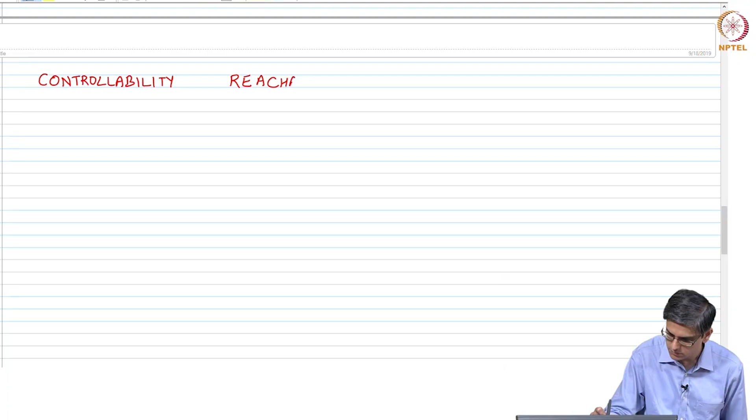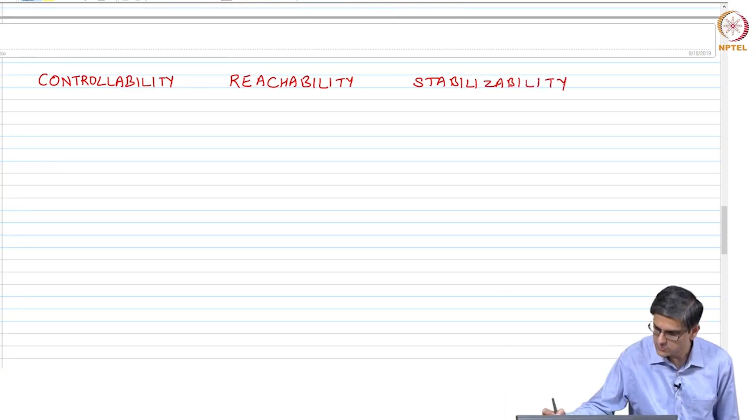Let us now talk about the next concept, and that is controllability or reachability or stabilizability. Okay. Let us look at the example that we had seen right in the first lecture of module 2, we talked about a stirred tank heater.

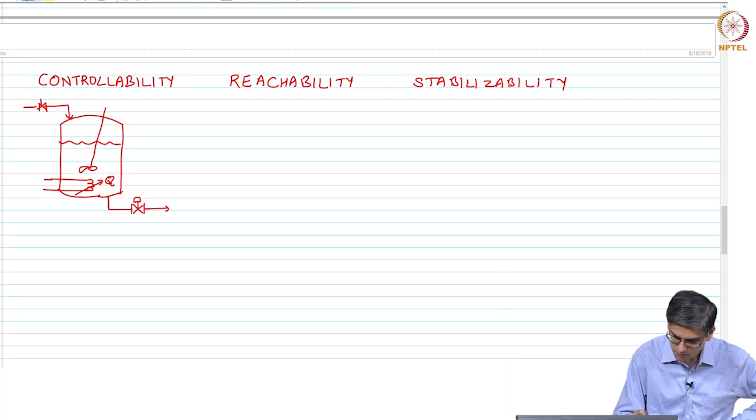Okay. We said that we had two inputs, Fin and Q, and we had two states and two outputs, height and temperature. Okay. By changing flow rate, you can change both height and temperature, right, but by changing Q, you can only change the temperature, but you cannot change the height.

Okay. So, this idea we will now go ahead and formalize into this concept of controllability, reachability and stabilizability, three related concepts, but still they are three different concepts. Okay, very closely related but slightly different concepts. Most of the time you would hear the term controllability.

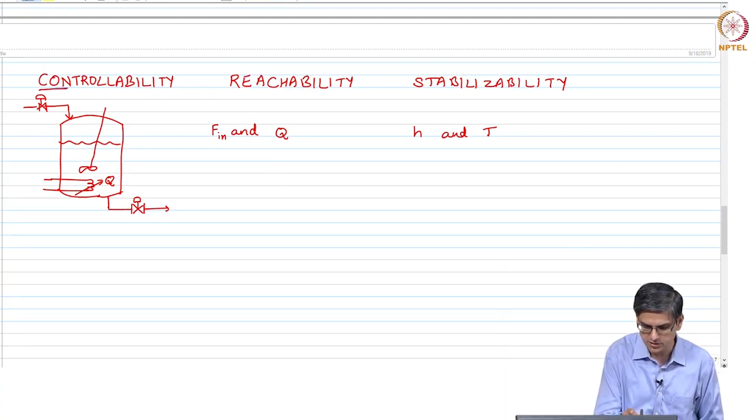Okay. Now, let us say that we only wanted to use one input. Let us say there are two systems, one is a stirred tank heater with only Fin as the input, another is a stirred tank heater with Q as an input. Okay. It is quite obvious that in the second system you can only control the temperature, but you will not be able to change the height just by using your Q as the input.

Okay. If Fin changes, there is no way you will be able to control the height. If I tell you that right now the height is 1 meter, I want you to change the height to 1.2 meters using just Q, you will not be able to do it, right. If this was a 2 output 1 input system, using Q, H is not reachable. What does therefore reachability mean?

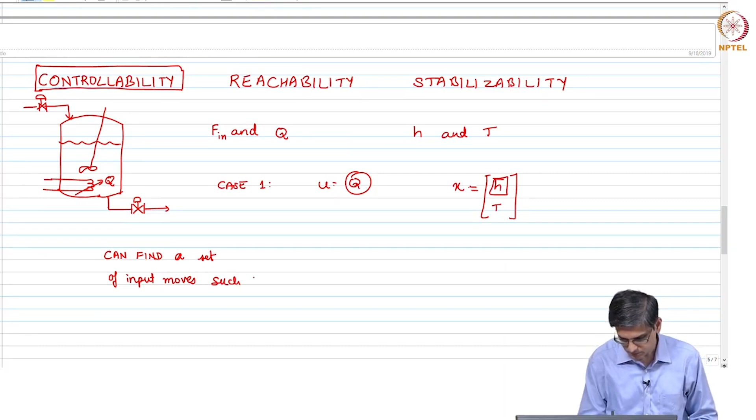What reachability means is: let x naught be any arbitrary point in the n dimensional space. Let xf be any other arbitrary point in the n dimensional space. If you can find a set of input moves to take your system from x naught to xf in finite number of steps, the system is reachable.

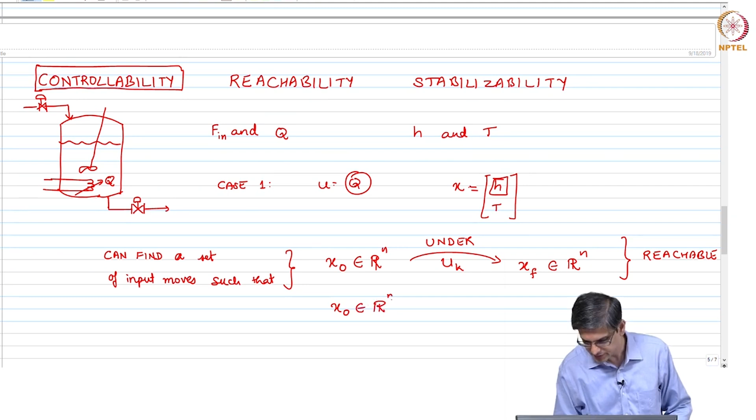Okay. If you can take the system from any arbitrary point to the origin, then the system is controllable. Okay. Both these cases you have to take them in finite number of steps.

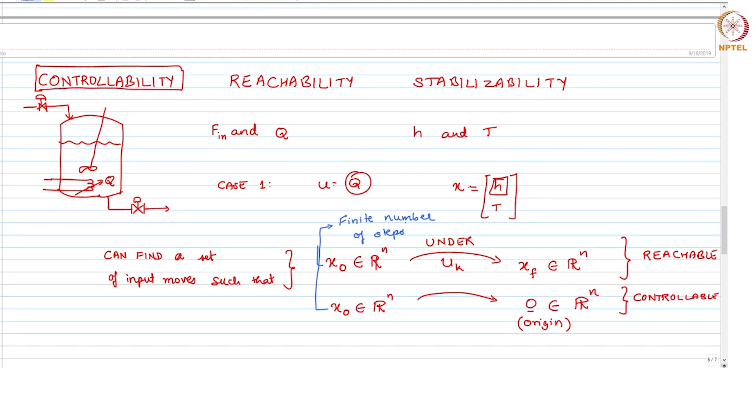Yeah, deviation variable. Pretty much we left non-deviation variables after module 2 or after the first lecture of module 3. After that we have absolutely not talked about regular variables. You can always convert everything from regular to deviation variables. Okay. It cannot be a non-deviation variable, right.

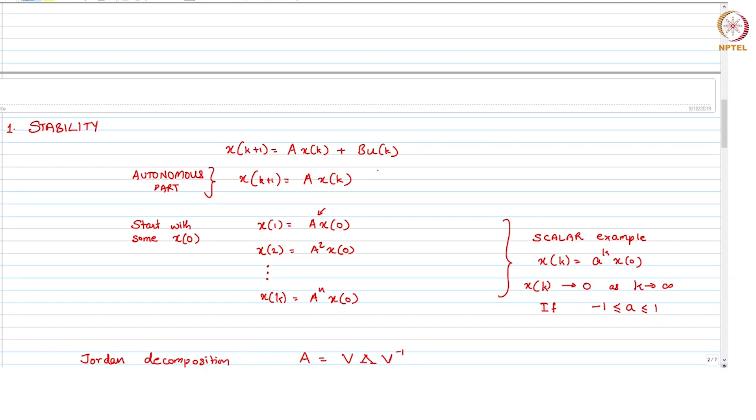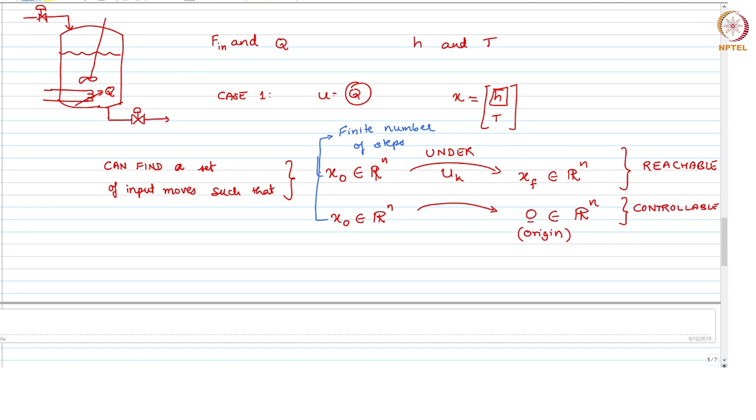So, if you look at this, what is its equilibrium point with u equal to 0? The equilibrium point without any inputs is the origin, and if you consider most physical systems, origin is not where the equilibrium is reached. H is not equal to 0, T is not equal to 0. In fact, T equal to 0 kelvin is not even possible to reach as of today. Okay. But if you can take it there, then the system is stabilizable.

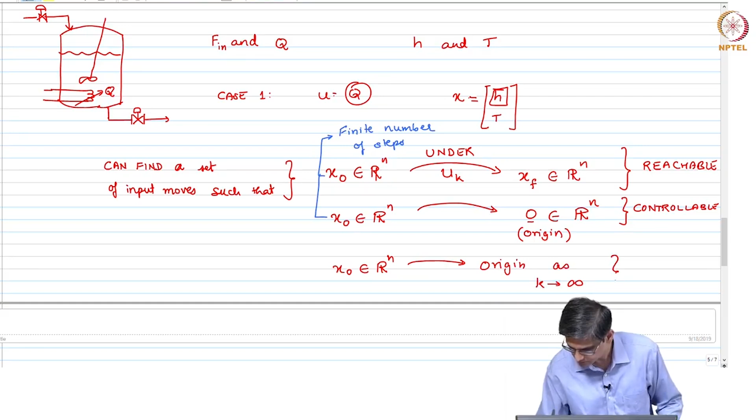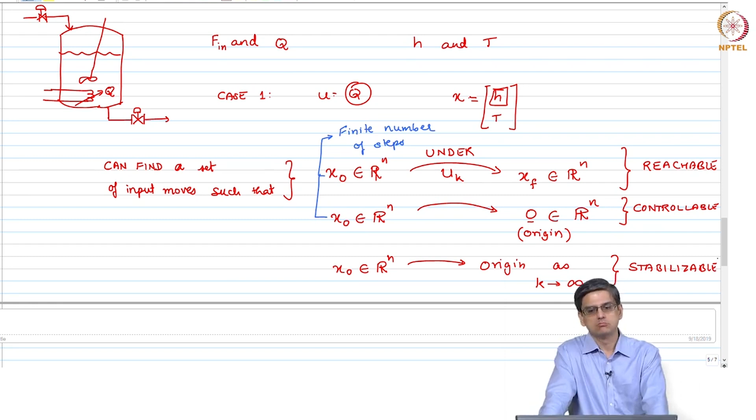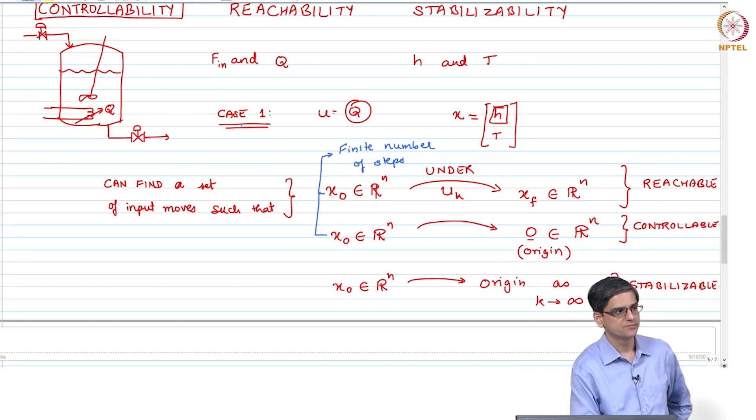Okay. So, question, is the system defined in case 1, do you think it is reachable? No, right, because with Q you cannot take it to any arbitrary H. Is the system controllable? Can you take it from any arbitrary H value to origin? H we can't bring back to 0. Yeah, we are only talking about the equation x k plus 1, I will put it in a different color.

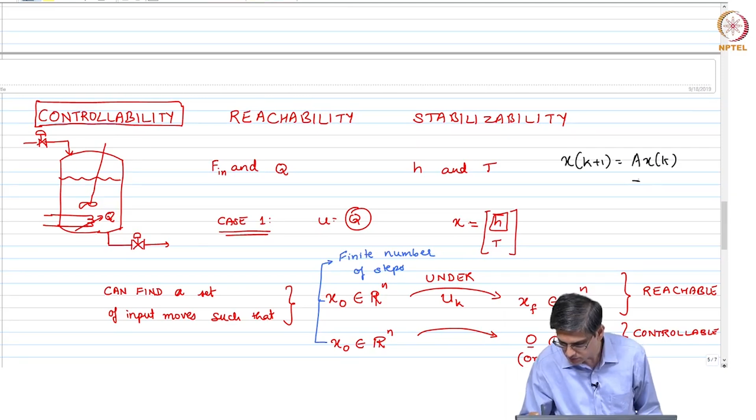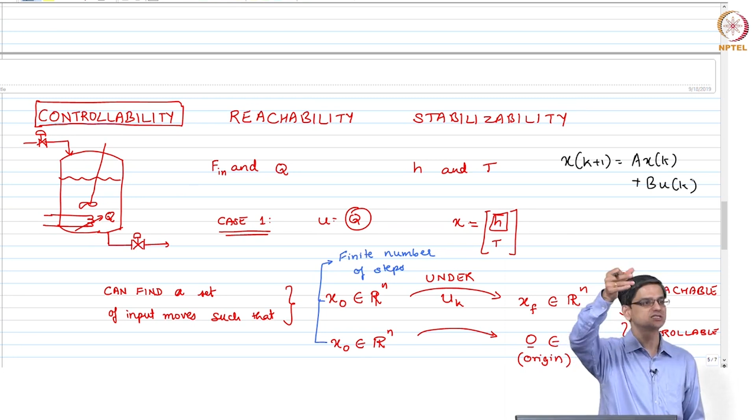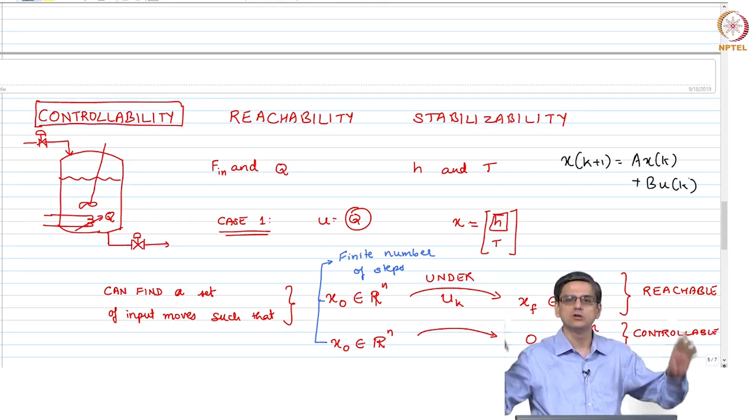Okay, I have not added Bd d(k). So, changing the inlet valve to a different value is not permissible in this particular formulation. Okay, so there are no disturbances over here. We are only talking about quote unquote perfect systems right now.

Okay, so what do you mean by we go to an arbitrary initial condition? Let us say we have taken boiling water, 1 liter of it, dunked it in our tank. Because of that the height went from 1 meter to 1.1 meter, let us say, and the temperature went up from 50 degrees Celsius to say 60 degrees Celsius. Can you bring that system from 1.1 meters and 60 degrees Celsius back to 1 meter and 50 degrees Celsius in finite amount of time?

No? Yes? You can only bring the temperature back by reducing the heater power and then bringing back the heater power to its original value. That is how you will bring the temperature back. Okay. So, you can bring the temperature back, but not the height back in finite amount of time. So, in this example, the system is not controllable. The question is, is the system stabilizable?

Yeah, we have moved it away from steady state. If you have gone away from steady state, I just dunked 1 liter of hot water in there, right? Take it away from steady. Yes, you can say that you have put in a disturbance. We don't call it a disturbance. We call it a different initial state, a non-origin initial state.

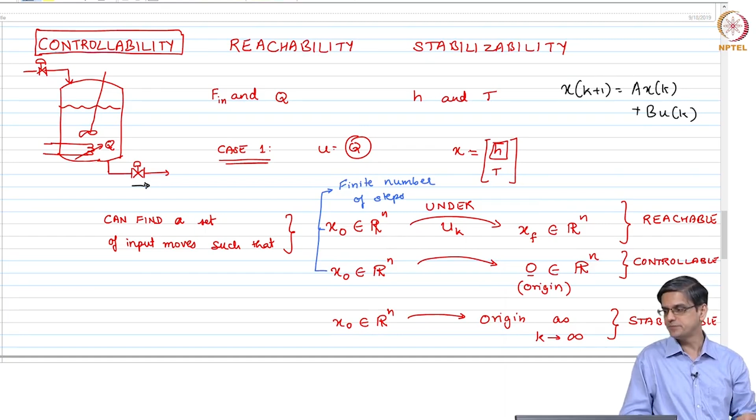An asymptotically stable system is always stabilizable. What that means is x naught you have taken it somewhere, okay, you do not do anything with the system, it will on its own come back to origin. That is the definition of asymptotic stability, right. So, any system that is asymptotically stable is also stabilizable. It may or may not be controllable, okay.